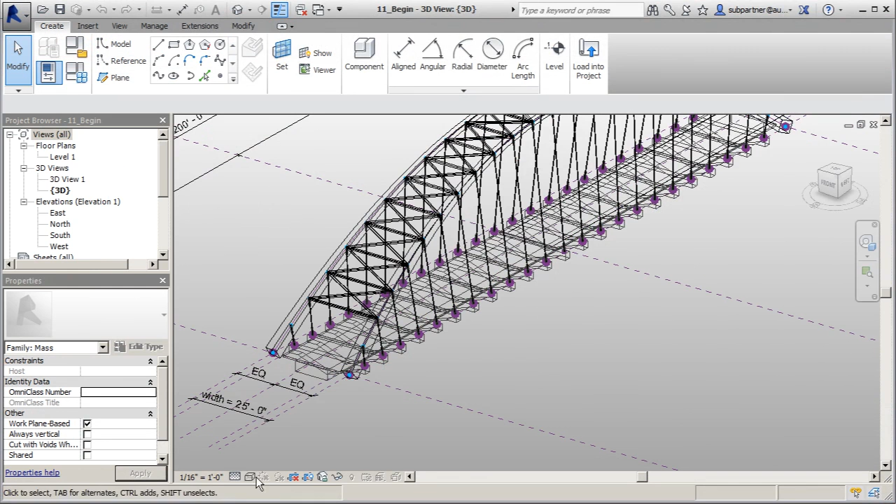We're making some really good progress. I'm going to get out of the wireframe view, jump to a shaded view, and check out the progress on our model. We're doing some really good work here. We've got our connections in place, cables, our little vertebrae here on the bottom.

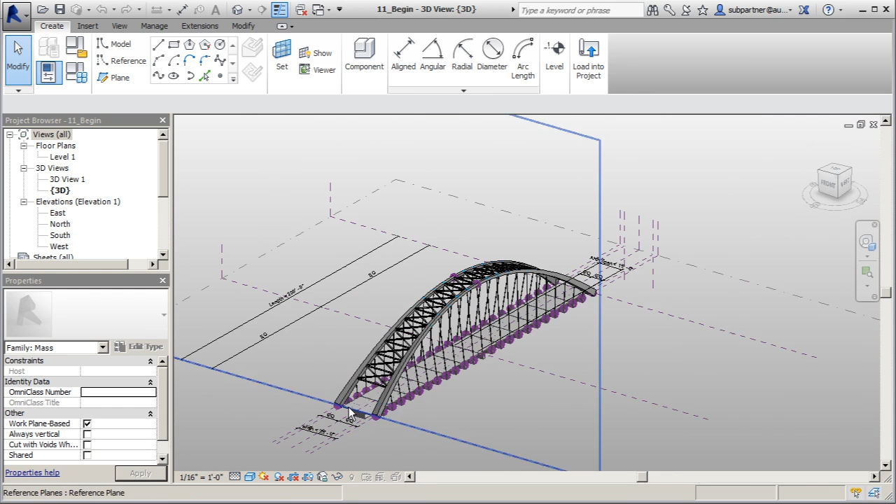So far so good. Now we need to create the footing for each one of these guys on this side. The key to this footing is it needs to be beefy and deep, but in my design, I want the exposed part of that footing to follow the form of this arch to create a nice dramatic look.

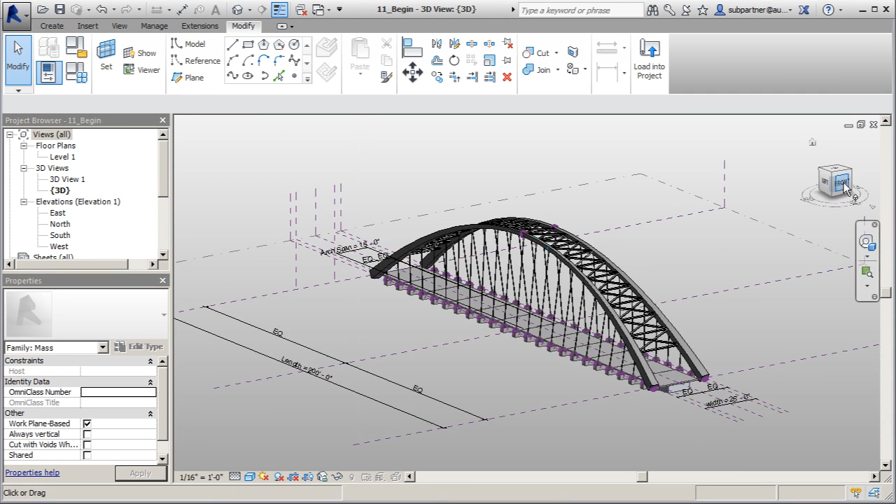To do that, I'm going to set my first work plane here, and we'll work from the front. When building this footing, I need to take into account this walkway, but also make sure these will actually be embedded into that footing.

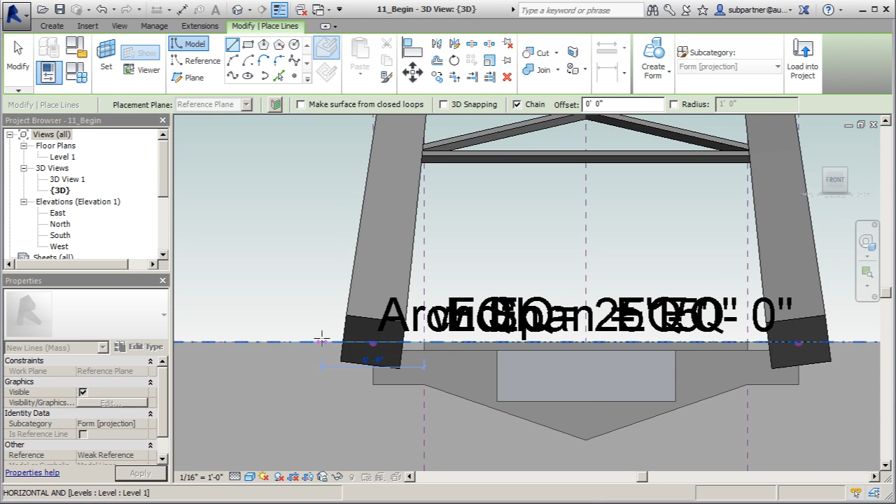I'm going to start mine up here, right at this corner, and we'll simply draw across till about 6 feet. Then I'll drop it down about 15 feet, bring it right back across, exaggerating how it goes across there.

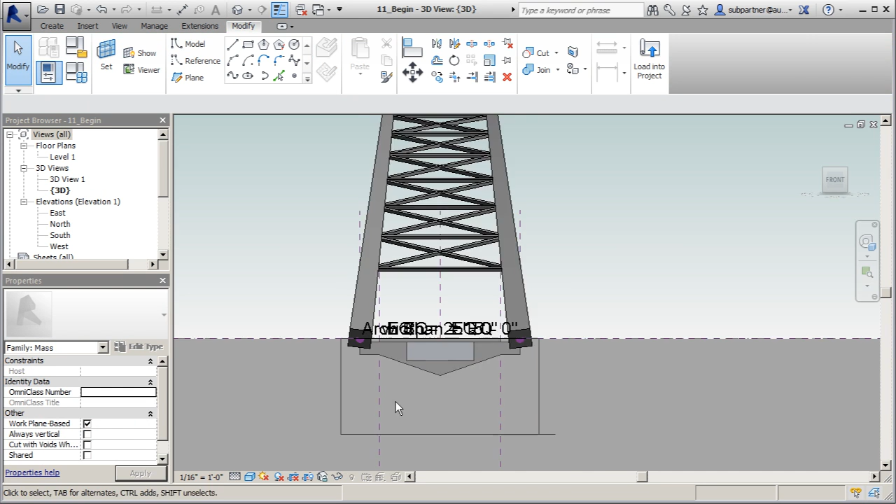Then we'll do the same thing here, going out 6 feet from this side, bringing it right back down. We'll make sure that corner is cleaned up - actually, I'll do it right now by grabbing that point and snapping it to that end point.

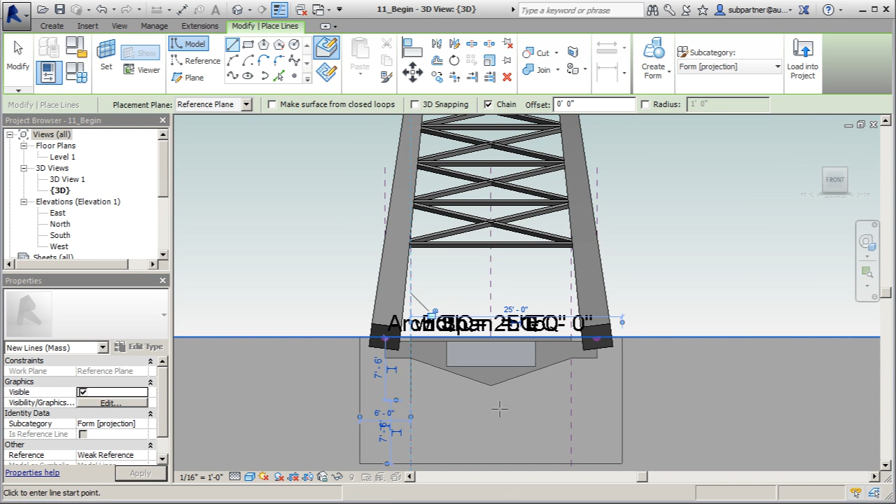Now we just need to finish off our line work. My footing needs to go from this area to there, and I can drop this down quite a bit, making that adjustment later - I'm not too worried about that. I'll bring this right across, snap to that point, bring it up here, and finish out that form. We should be able to create our form at this point by selecting.

I'm going to orbit around here, go to Create Form, and push this out to a distance I need. So I'll grab this green line and drag it out about 20 feet.

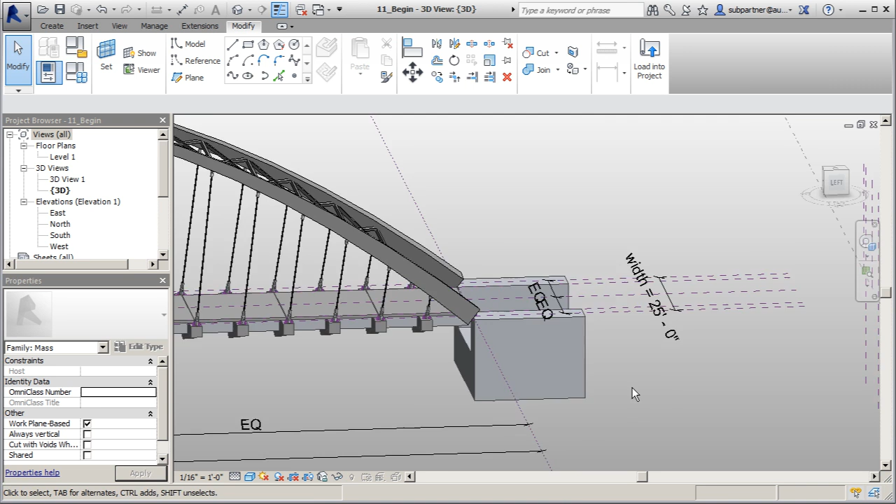Now I need to elevate these surfaces so that this is embedded into that footing without blocking the walkway. So we're going to increase this distance - let's go with 17 feet.

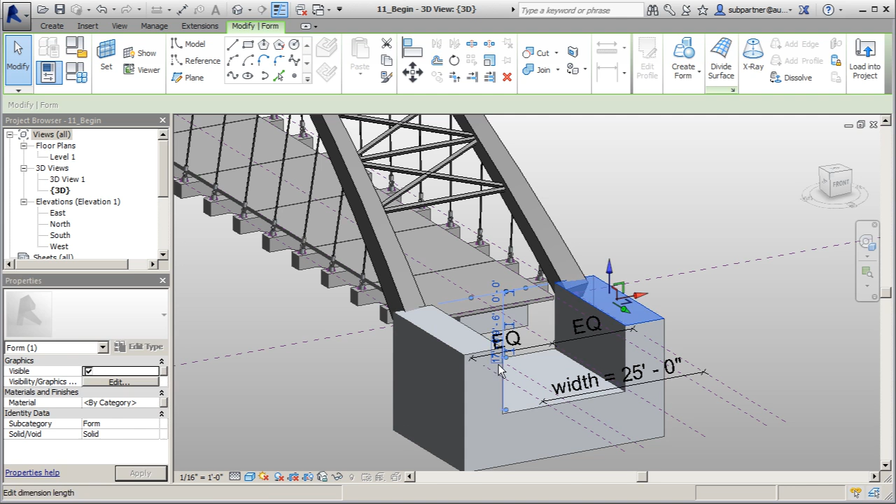We'll do the same thing to this surface, and I'm going to change that dimension to 17 feet. That way, our structure is actually embedded into that.

We'll see if we need to do the same thing here on the bottom. Yeah, we definitely can stand to extrude that out. So we'll grab this face and bring it out enough to get that embedded - we'll say 22 feet.

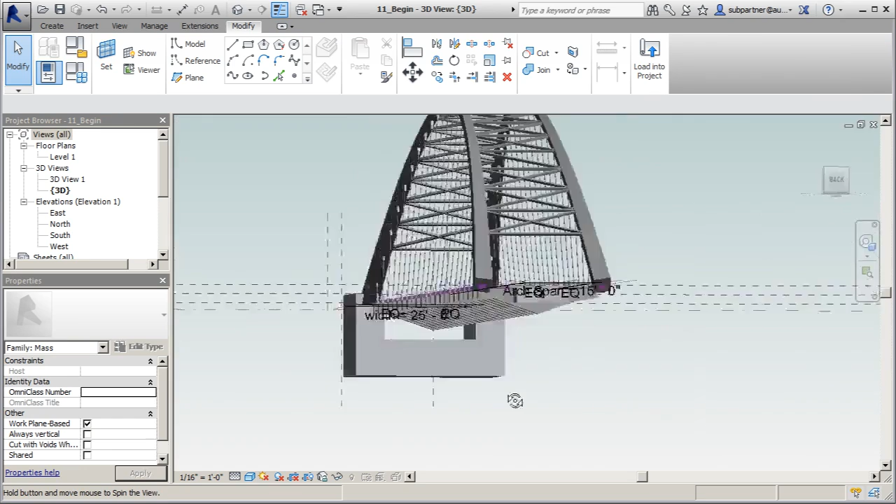We are making some really good progress here, I like where we're at. Now what I need to do is extend out the edge of these slabs, say about 6 feet or so.

You'll figure out why once we load this into the project. So I'm going to select, and change this dimension to 6 feet.

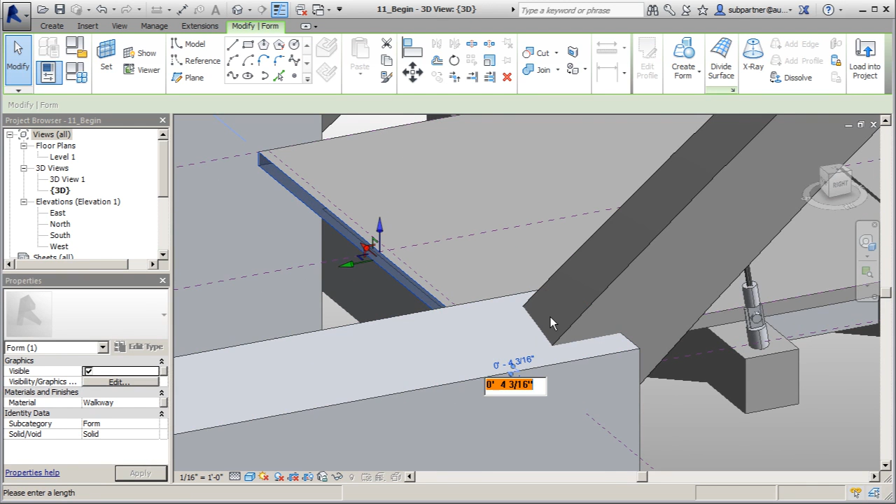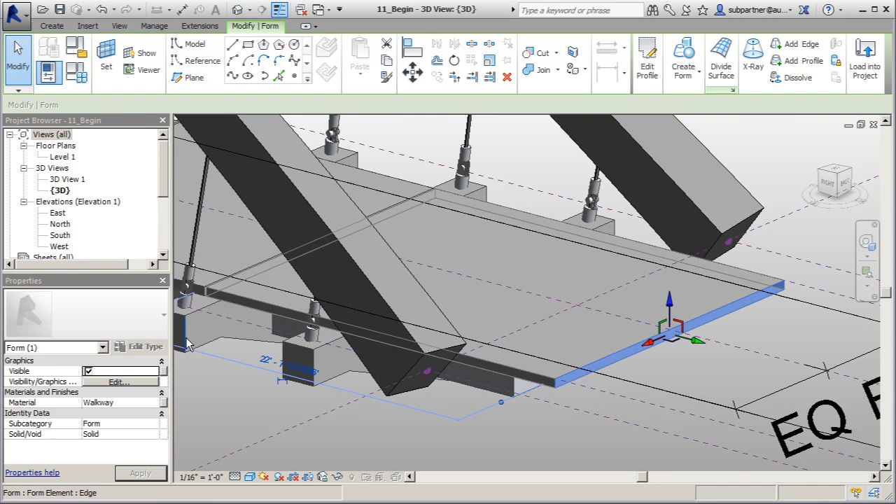Bingo. We'll do the same thing on the other side here. So I'll go back around, tab on this face, extrude it out, and add 6 feet to that dimension - this should be 22 here. I'll hit enter.

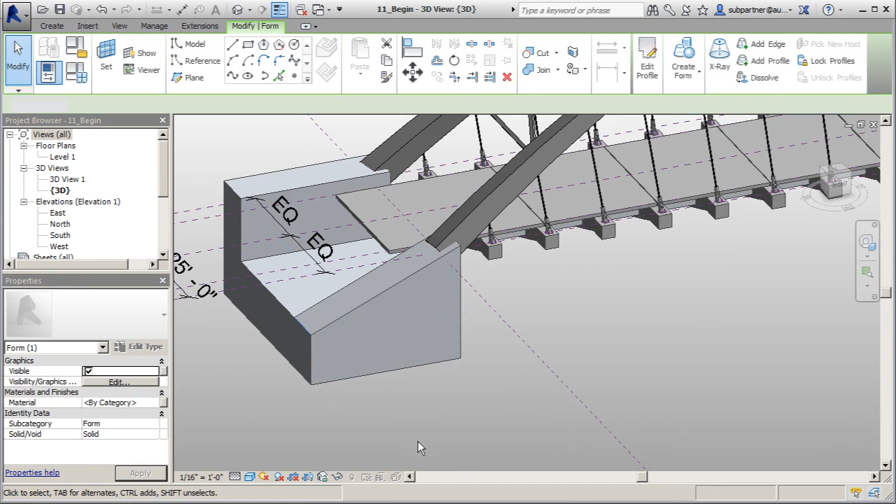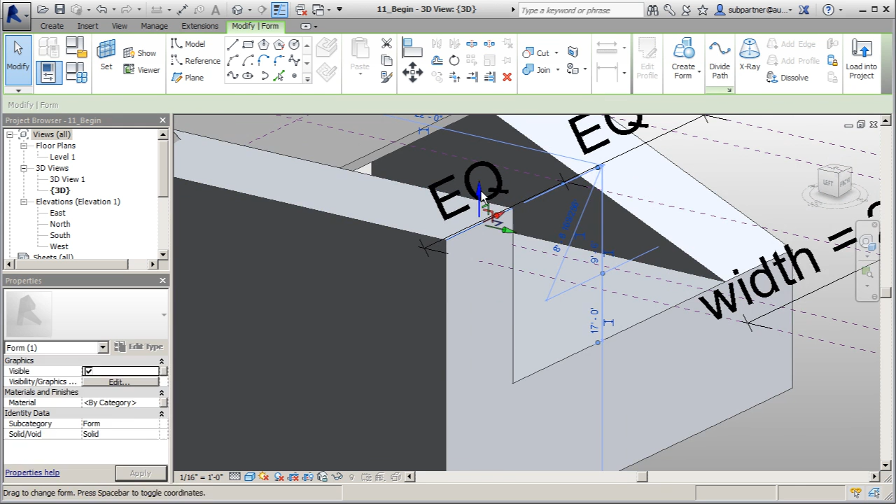We'll do this exact same thing on this other side. Make sure we grab the edge is what we're after - let me go back and Control Z there. I'm going to grab this edge, tab till that edge is highlighted, strictly that edge. There it is, and I'm going to drop this down to about that point as well.

So what we've created is our footing that's going to follow that. You can see I probably need to raise this up just a bit - this face can probably get raised up just so that element is buried in there nicely, like so.

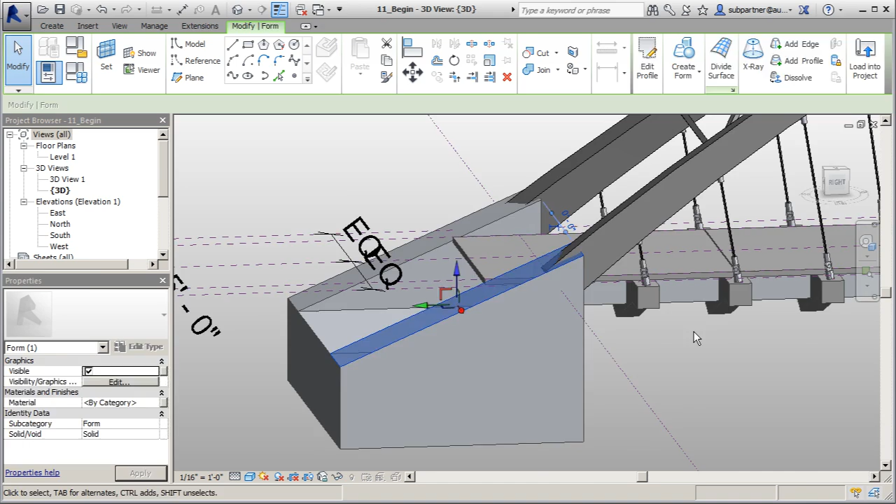I'm happy with what we got so far. Now I'm just going to take this and mirror it to the other side - I don't want to have to go through this whole process of creating and forming this thing again. So we're going to jump to our east elevation.

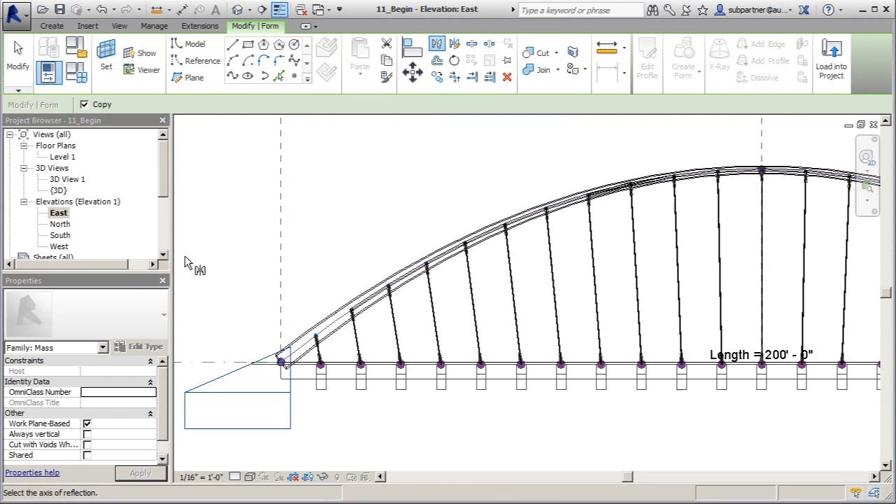I'm going to tab on this foundation until the entire thing is highlighted, and we're just going to mirror by selecting axis - we'll select our midpoint. That should shoot right across, and it did, and we can orbit around here in 3D view. I'm liking where we're at so far.

So we could save where we're at here, and we're going to bring this into our project, into where our site is located, see if we can't get it to fit, and see if we can finish our project out there. So I'll see you in the next lesson.